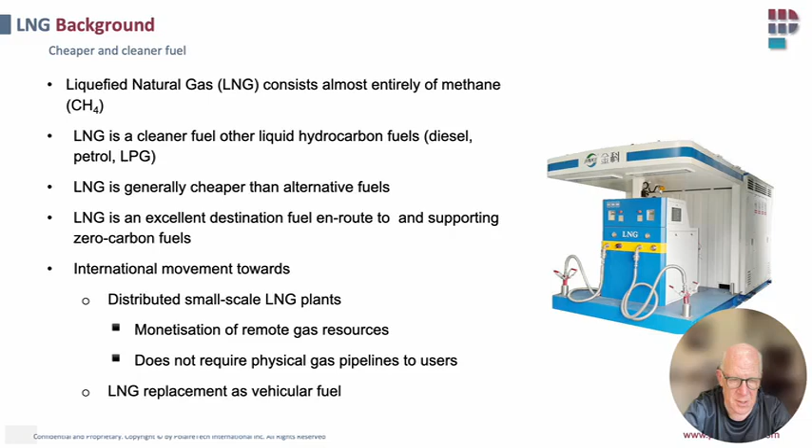And there's a big international movement towards distributed small-scale LNG for monetizing local gas resources; we're going to talk about that. You do not need pipelines, you liquefy the gas where it is and you distribute it to the customers in normal tankers, cryogenic tankers.

PolaireTech was formed or established in Calgary in Canada. It's mainly the same shareholders in PolaireTech, except for a few, as the shareholders in Ownerteam Consultation. Ownerteam Consultation is a small consulting company in South Africa. PolaireTech has an affiliate in India and also an agreement with Praj Gen X for module manufacturing. Praj has a very modern module yard run by robots and things, but we don't have to use them for Southern Africa. It was mainly focused around the Asian market.

Gasconsult is the company that holds the process license for the technology. DyCat Solutions are in Canada. They are experts in standardization and modularization. Proconics, I think that you know of, they actually have a shareholding in PolaireTech International.

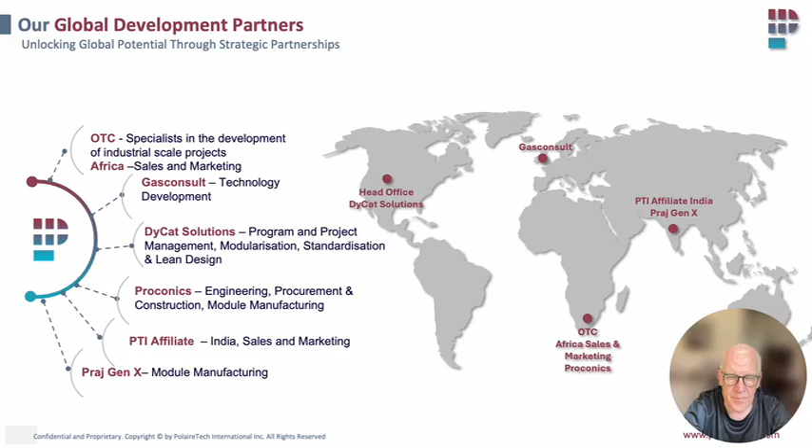Why would one want to use small-scale LNG? The whole idea is that you take a local gas resource, whether it be coal bed methane or natural gas or biogas or whatever, and you make it easy to transport it to a local end user. In order to do that, the natural gas is liquefied in the form of LNG. That liquefaction technology is specially suited for small-scale plant. It's not similar to technologies for big plants of millions of tons per year.

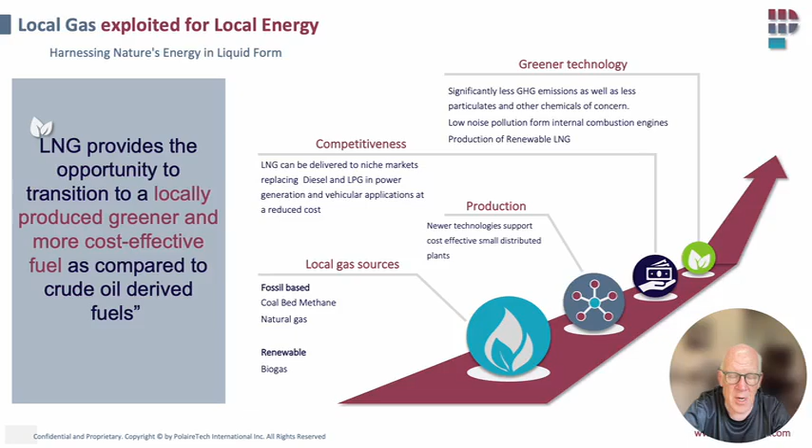And in that way you make energy available much cheaper, much cleaner, and reliably to end customers in your region, and you make yourself independent of imported LNG, or energy, which is becoming a big topic these days.

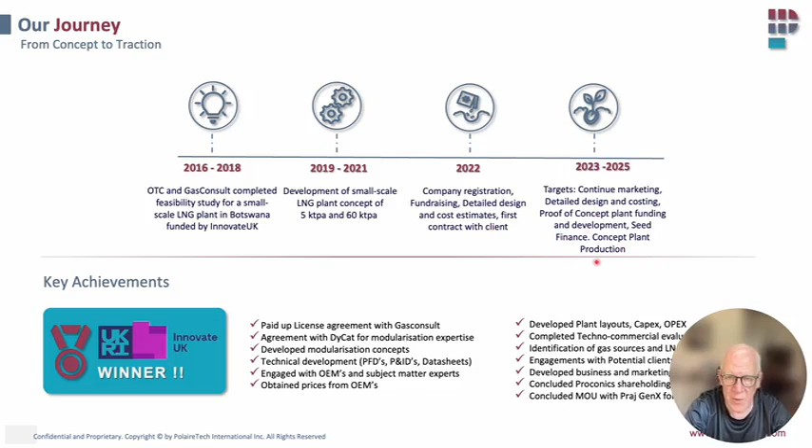We started in 2016 with a feasibility study in Botswana. That looked quite good. We then decided as OTC that we will develop this LNG technology further. We formed the company, registered it in Canada, and we are now working on establishing the first concept plant to actually show people that it works and it can be commercially viable. You can use any sort of gas here: biogas, coal bed methane, pipeline gas, natural gas, whatever, and use it for transport fuels.

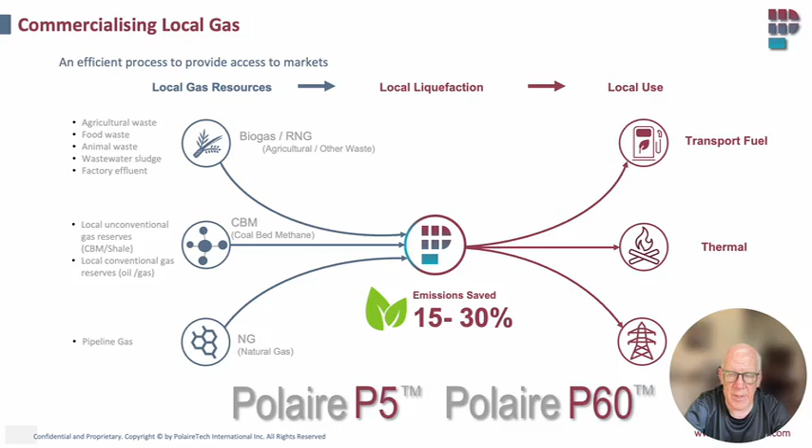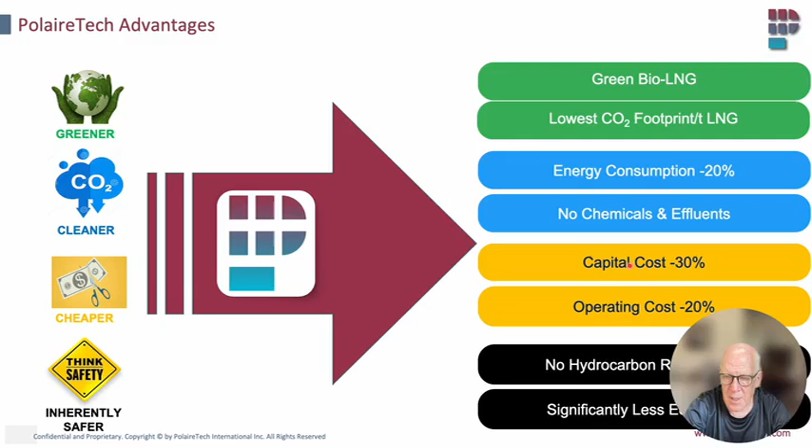We believe that the PolaireTech technology actually requires less energy to liquefy the same amount of gas, and this is the emissions we believe you save in CO2 compared to other technologies, so it is quite a bit cleaner. We believe we have the lowest CO2 footprint, lower energy consumption than competitors, low capital cost, low operating cost, and very simple to operate. It is a standard modular unit, just like you would buy a compressor skid or a power skid or a turbine.

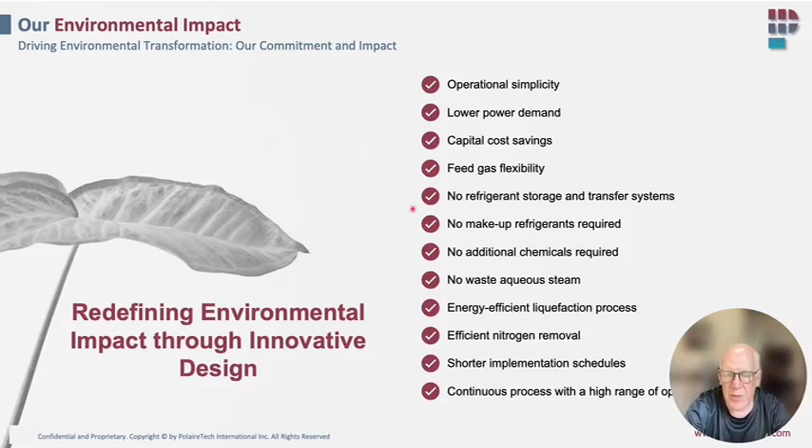The environmental impact stuff, you can see some of it here. I'm not going to read through it. A big thing is that there is no refrigerant in the system. We use the methane inlet gas directly for that.

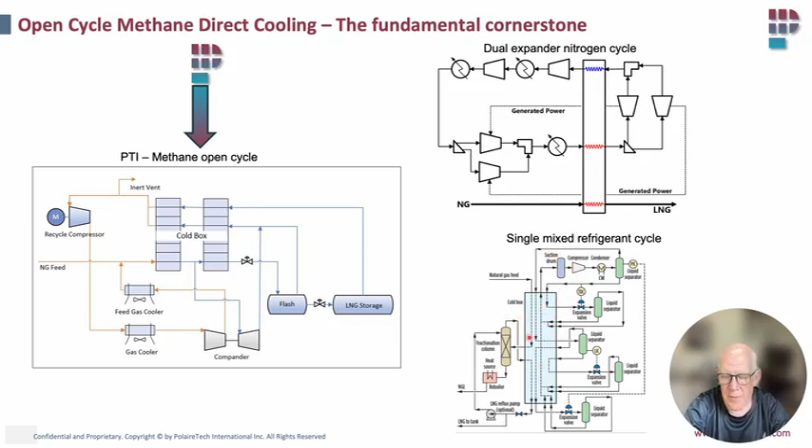This is the overall flow scheme. Our flow scheme is on the left. You can see it's much simpler than competitors. The main competitors are dual nitrogen, and very efficient processes use mixed refrigerants, which is even more complex than our process. You can see there's only eight pieces of equipment here.

This is the power consumption. We actually compare ourselves with the Z1 LNG as to the dual nitrogen here. You can see we consume less energy per ton of liquefaction. We have 8 pieces of equipment compared to about 19 here.

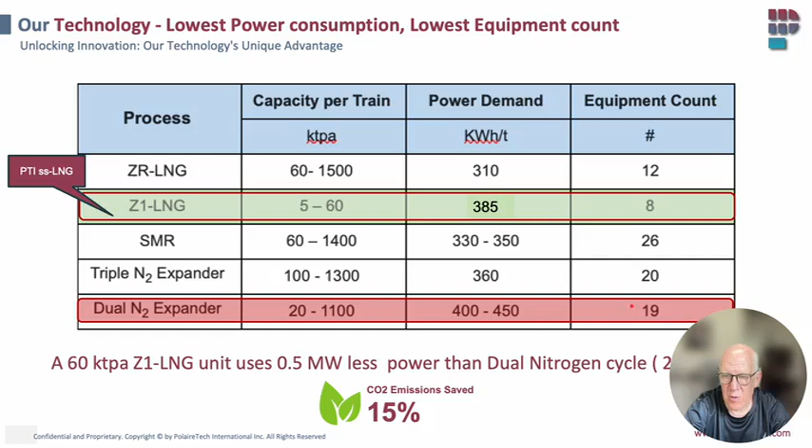This is what the plant basically looks like. This is the compressor skid here. This is the cold box and the actual piping and control valves. The LNG is accumulated in this vessel and then loaded off into ISO containers from this vessel.

Just sort of a bit for a reference, the liquefaction unit is 12 meters by 13 meters, so it's small. It's not a plant, it's just a skid, if I can call it that. It'll produce 7.5 million liters of diesel equivalent fuel. The end users, if they use the 7.5, they will reduce the CO2 emissions compared to diesel with about 4,500 tons, and they will save roughly half of their fuel costs.

So if you buy the 7.5 million liters, you'll pay around about 10 million, whereas if you buy the LNG and take into account the higher efficiency and carbon taxes and all these things, you can see you will save a significant amount of money here.

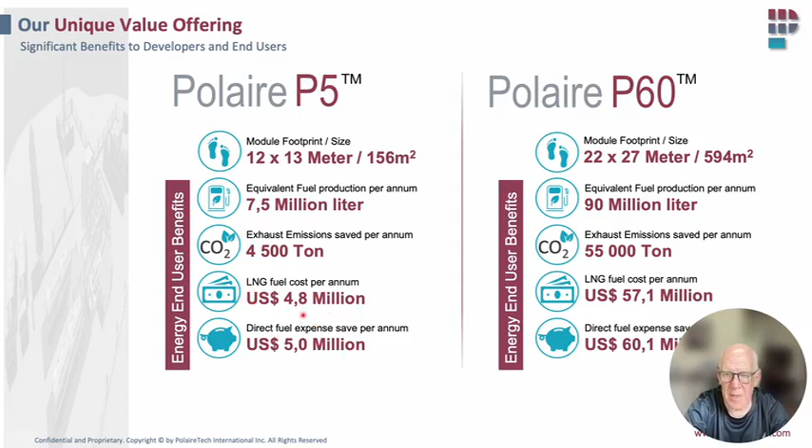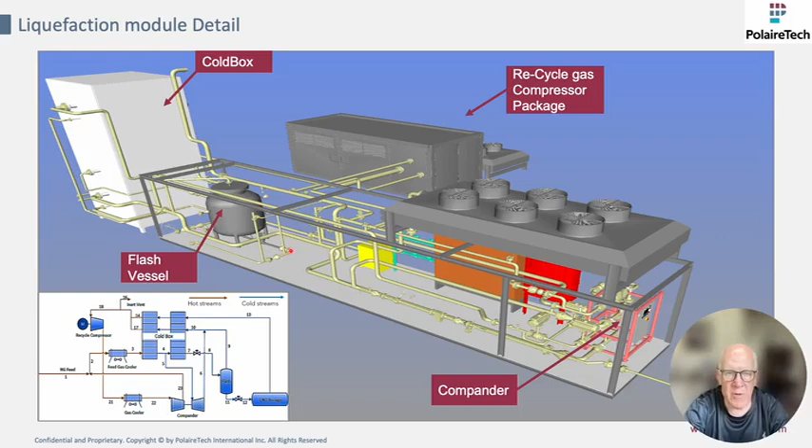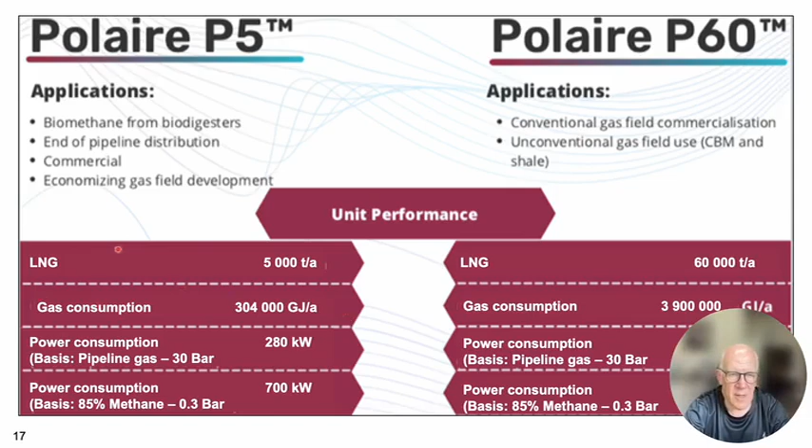This is just a different picture of what the plant looks like. This is a more expanded view of the actual module, with the piping and all of that. Bit of performance data, if you're interested in that. 5,000 ton per annum unit here, 60,000 ton per annum unit here.

Bit of background on the global LNG markets. Global LNG markets are growing rapidly. Their growth rate is around about 15% compared to commodities growing at 2, 3, 4%. It's already a $92 billion business.

Key things that drive the growth are increased LNG production from local fields, increased power demand, the need for commercialization of local gas. I mean, it's clear that all countries are trying to make themselves more energy independent. At the moment, South Africa is sort of completely banking on importing LNG into the future.

But we have a big gas resource in South Africa that we believe can be harnessed for this, and end users may be heavy duty vehicles, industrial power users, marine tugboats, big ships, transport, trains, all these sort of things where diesel can be replaced with LNG, and in two ways.

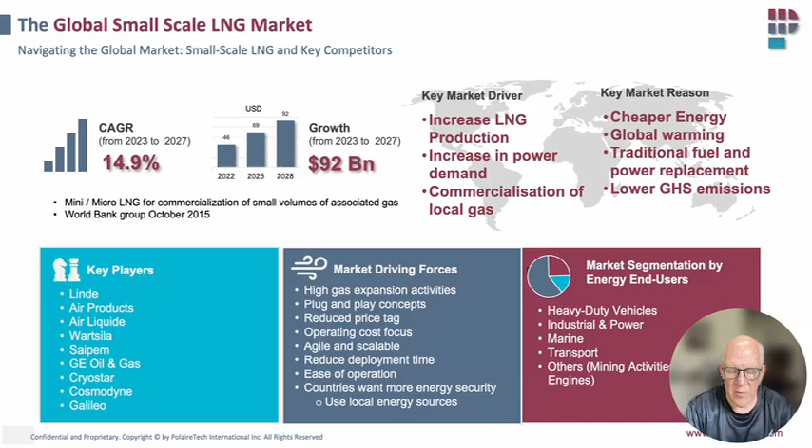Either you can retrofit a diesel engine with LNG supplement and it will sort of save you, say, 50% on your diesel. It will use 50% diesel and 50% LNG. It depends a bit on the load and the road and all that. Or you can put in a 100% LNG engine, which is like a spark plug engine then, and you will be dependent fully on LNG then.

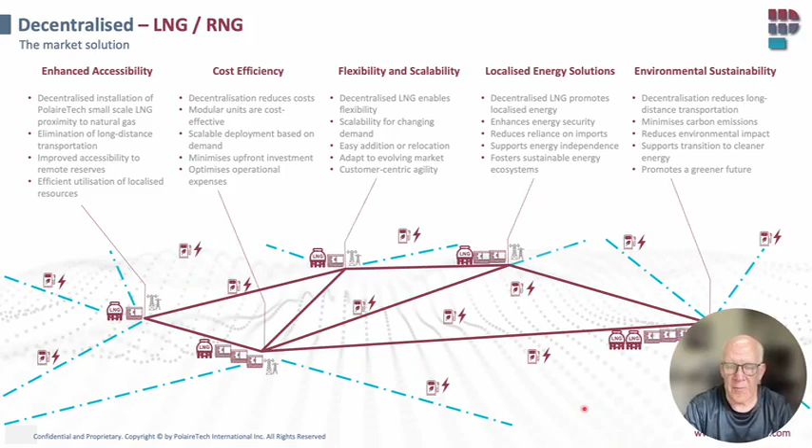The idea is to have distributed centers where the LNG can be produced and used locally as and when required and so on. It gives you a lot of flexibility. You can scale and ramp up as demand grows, and you make the environmental impact a lot less. If you compare this to a big gas plant centrally somewhere with pipes leading up to the central facility and then some pipe work from there to customers, this is much more scalable and easy to handle.

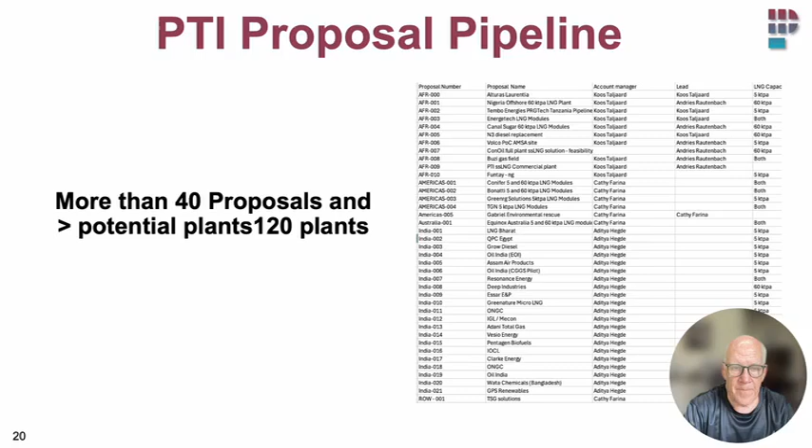Investing in PolaireTech, what is the case for that? If we just look at the business model here, PolaireTech is a company that will manufacture these modules and sell them to end users. So it could sell a module to what I call here the LNG SPV, Special Purpose Vehicle in South Africa. The idea is that we establish this SPV and we get funders investing in this special purpose vehicle.

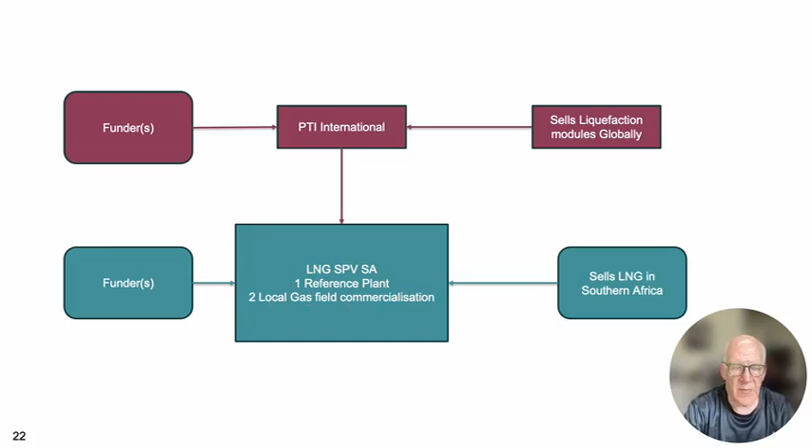The special purpose vehicle will source gas from the gas field and sell it in Southern Africa through firstly the reference plant and then secondly through other gas fields in the region. So the idea is to have the modular inland plant to help with energy transition. So PTI and OTC invite people to take participation in this, firstly in the 5 kiloton facility in Sasolburg, where we will take the methane and make LNG.

We need around about $250,000 to get the project to bankability, to a bankable level. Once it's at bankable level, we can go and source funding from other investors and so on. We need in total, say, around $7 million to construct the facility up to the point where it is running as a commercial plant selling LNG.

We will have to draw off money in tranches as required. The moment we are at bankable and we want to order the equipment, I think we need around about $2.5 million to place the orders for the big compressor, the cold box and so forth.

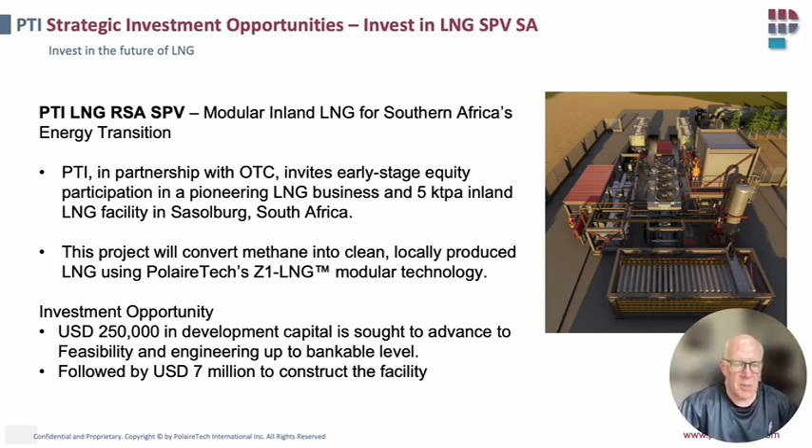What will such a plant economy look like? We've looked at two cases here: one where we sell LNG at $16, and one where we sell LNG at $20. Customers at a fuel station currently buy diesel at just over $30 per gigajoule, so you can see this is substantially lower. We think $16 is the bottom line, and $20 may be the upper line of what we can get. Even as a reference plant to prove the technology, this would be economically viable.

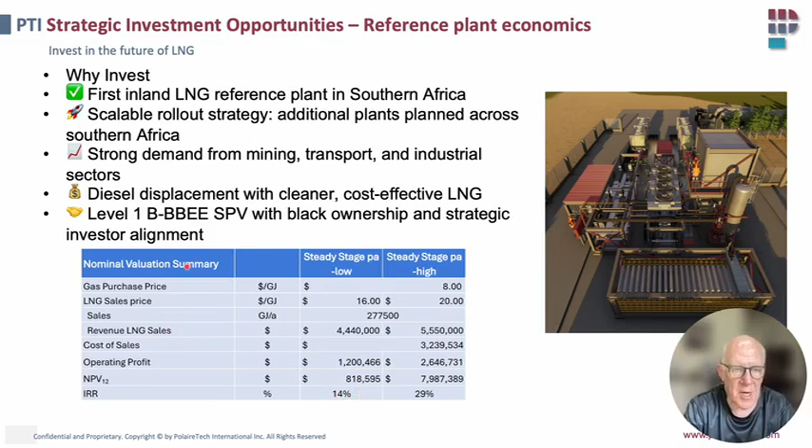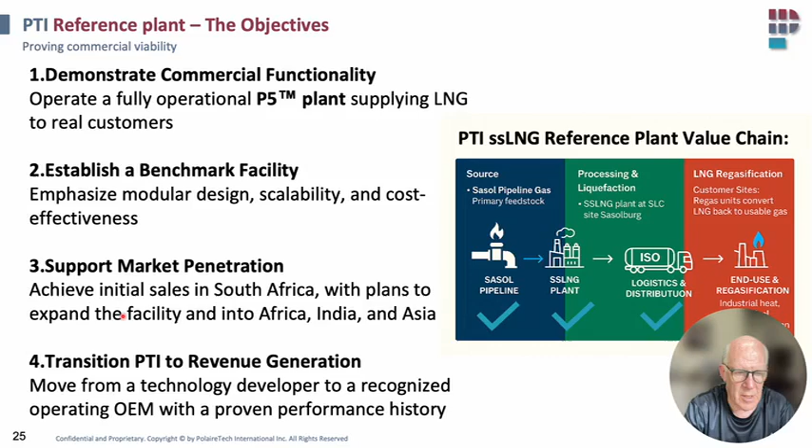Maybe not at the higher rate one would like, but it's the first step in a much bigger project, as you'll see. We want to get the plant operational, establish the benchmark facility, get LNG into the market, and start making revenue.

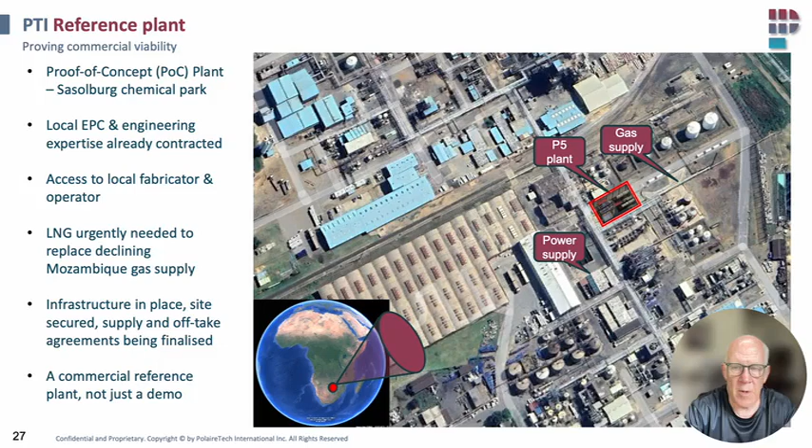We have an MOU from SLC that they will operate and maintain the plant for us, and they have a gas supply contract with Sasol. We also have a letter of intent from an LNG off-taker for 10,000 tons, which is actually double this amount. All these things are happening during the bankability stage, and in the next few months we must convert them into firm contracts, otherwise the project won't be bankable. But so far things are progressing quite well.

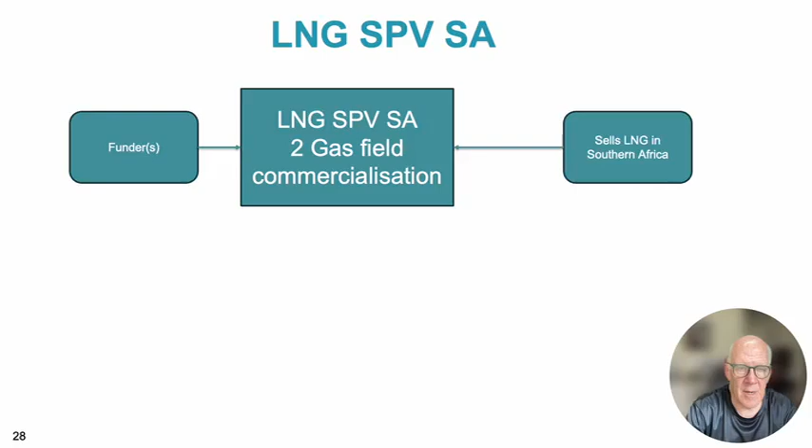The issue is how do you get it commercialized. We believe by using small-scale LNG plants that are scalable, we can put in a 5,000-ton plant to show the gas field and wells are producing, then add a 60 kiloton plant and another 60 kiloton plant, and expand like that.

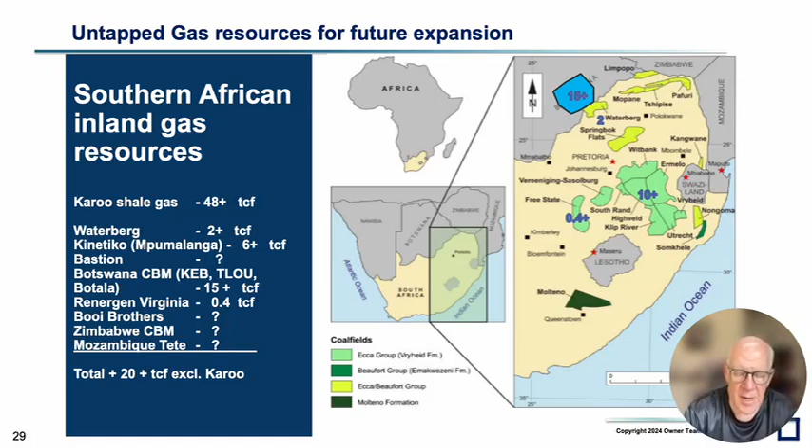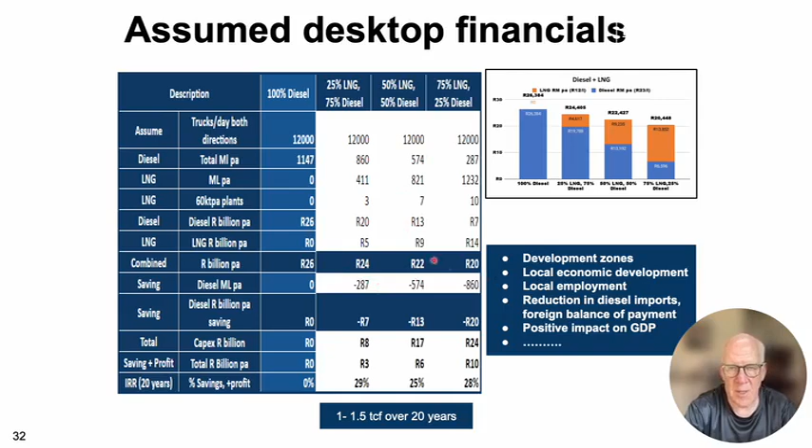So, cash investment or supply of hardware—we're talking to some people to supply us hardware and so on. We have to figure out the sort of deal we can set up within the SPV for equity investors, and maybe debt investors as well. The next step really is, if people are interested, to sit down and draw up a plan—what tranches, how we can do this, where we can find the funding from, and so forth. So that's a bit of background, and I think that's my story.